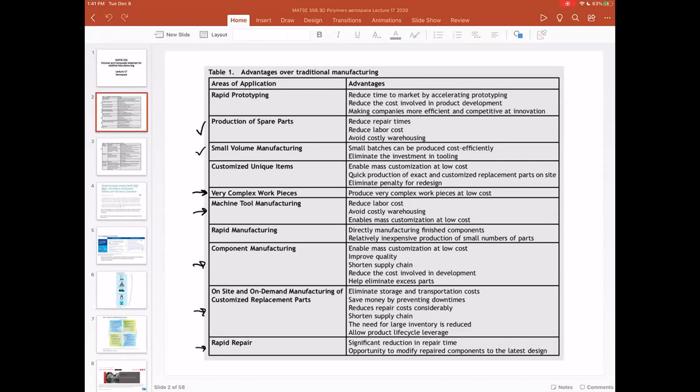So we refer back to this table and think about advantages over traditional manufacturing for additive manufacturing. And a lot of these things relate to the aerospace industry. So whether we're doing prototyping, whether we're doing component manufacturing, reducing aircraft weight. We'll talk a lot about that today because that is a major driver of additive manufacturing in aerospace, new engine components, flight certified hardware, and then satellite components where weight is a really big savings.

And often for satellite components, you're only making one of them or two of them. So additive is a real natural fit for space applications. And additive has gone a long way for industrialization in the general aerospace industry, including commercial and defense applications. And I think Kyle put up a link in the chat last time about aerospace certification for AM parts.

We won't talk too much about certification, but it's a very special part of the aerospace manufacturing industry. How do you certify the materials? How do you certify the component? You know, when you make a part for an airplane, you don't always get to test that part to failure because that part is going to go on an airplane, and you don't produce that many airplanes. And so how do you get certification, statistical reliability, reliability of the manufacturing process and the materials?

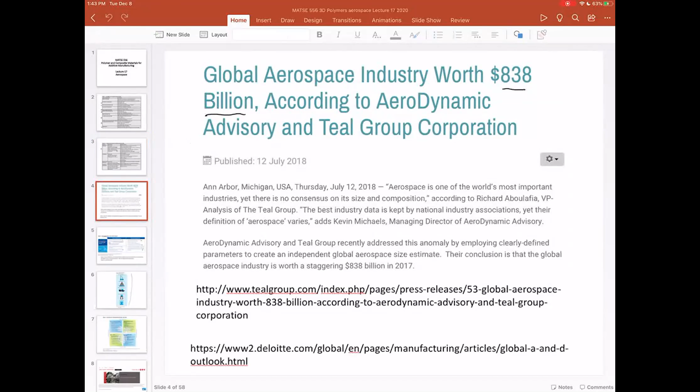So the global aerospace industry is relatively big, approaching $1 trillion. And so it's a market we're thinking about because if you can capture a certain percentage of $1 trillion, it's still a big number. And we talked about this table last time. And so A&D is aerospace and defense. And aerospace includes space and satellites.

And so there's lots of interesting current applications that people are looking at additive for, and lots of potential applications where people are developing new materials, new additive technologies, new approaches to producing these components. And so additive is a manufacturing technique that's really there to stay in aerospace. Just like biomedical, we've seen a conceptual change from how they made hearing aids or dentures in the past to how they're making them today with additive. And that same revolution is happening in aerospace.

Now, as consumers, we don't always get to see what those changes are. Of course, a lot of the special parts about airplanes and satellites are hidden from view. But when we go back to flying on airplanes here in the next year or 6 months, hopefully, most every airplane that you fly on commercially is going to have an additively manufactured part on it. So it's a big part of the industry, and there are lots of opportunities for additive in aerospace and defense, and lots of opportunities for polymers and composites in the aerospace industry.

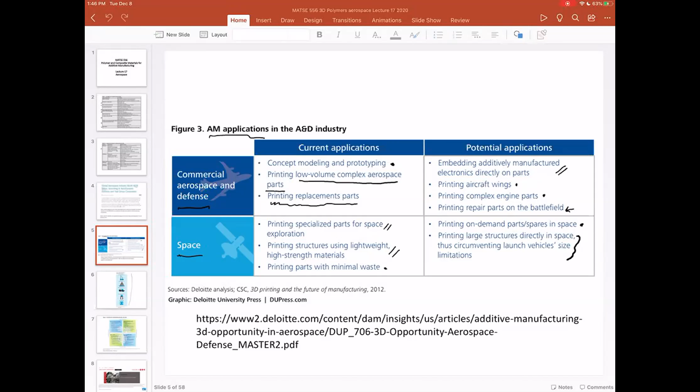So again, what we've learned in this class about high performance polymers, composites, and additive manufacturing will have a lot of importance in these fields going forward. And so there's important facets to the aerospace industry to remember when applying additive. And so this is from this Deloitte report, and we'll look at the link here in the next slide. But these are some of the key drivers in the aerospace industry for additive manufacturing.

So lower part cost, and decreasing part cost really comes from simplifying the tooling and simplifying the manufacturing of the part. So if you're only going to make 100 airplanes, you have to make the tooling for all those parts. And if you can do additive manufacturing, you don't have to make as many dies or as many casting facilities, etc., in order to manufacture those parts. And so part costs can come down drastically because you're only making so many parts for aerospace, even for commercial aviation.

Scrap is important. And so if you're using really expensive materials like carbon fiber and titanium, those are hard to recycle. If you recycle scrap, that has to be a certified process as well. So there's issues with recycling raw materials in the aerospace industry. And so if you can cut down on the scrap rate, that will also decrease costs because you're using premium materials in this sector.

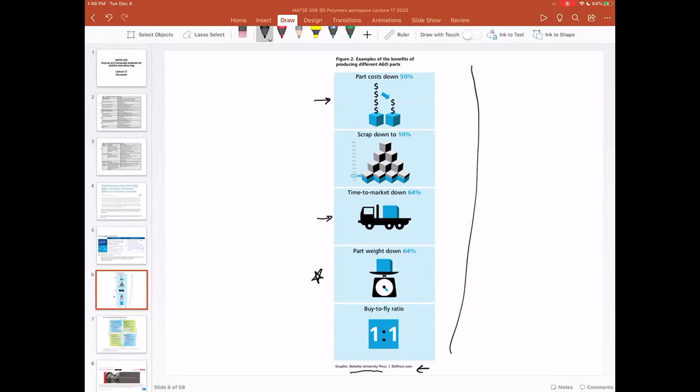So this is laid out in this Deloitte report right here. You can look up this report called 3D Opportunity, Additive Manufacturing Paths to Performance, Innovation, and Growth. That's fine. That's some buzzwords there. But thinking about how additive influences things like supply chain and product changes is interesting.

And Deloitte has sort of published this 4-quadrant diagram where if you don't have any supply chain change and no product change, you're sort of in stasis. And so you're just using AM to do the things that we know AM can do. You're doing rapid prototyping and design. You have low rate production. You're just doing routine stuff with additive manufacturing.

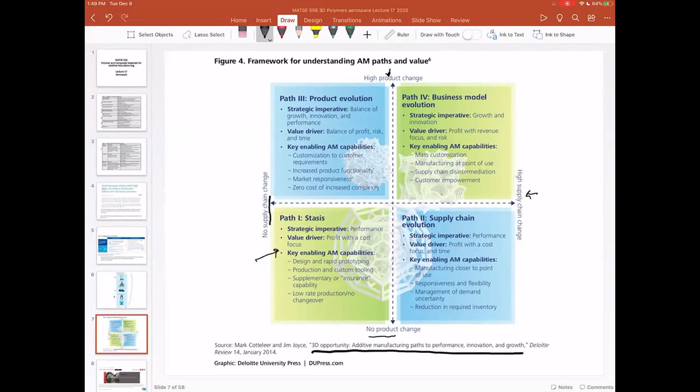However, as you get into high product changes, you can think about new products. And so how do you make new products with existing supply chains? So how do you do additive to do new things? Or if you're going to remake the entire industry, both changing the supply chain and changing your products, you have new business models. You can have growth and innovation. There's really interesting facets of AM with mass customization. Supply chain is disrupted, or there's new ways to do supply chain. You could do manufacturing at point of use.

And so thinking about the different aspects of what changes are occurring in the industry and what's happening with the products in that industry is a really interesting way to think about how additive manufacturing can contribute to aerospace, to automotive, to consumer goods, to medical and dental. And so this 4-quadrant diagram from Deloitte gives us a map for how we might think about placing additive in specific industries.

Are there any questions so far on aerospace or key drivers or unique facets to AM?

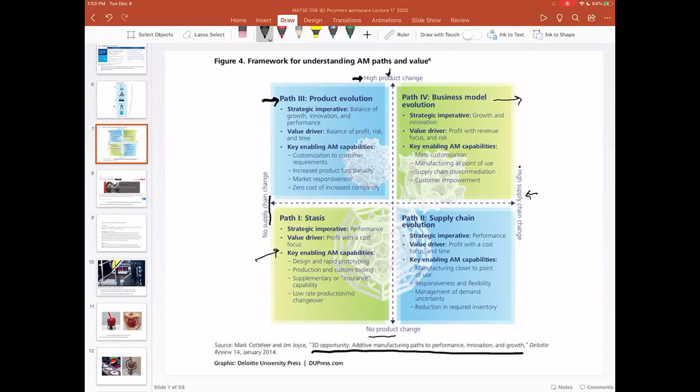Great. I'll put it up on Canvas for people to check out, because as we said when we started the lecture, qualification and certification is how things are done in aerospace. And so anyone who works in that business needs to be aware of it. Great. Thank you. Absolutely.

So there's a lot of cool case studies out there on aerospace, and this is from Prodways, that's an AM manufacturer. And so what they're doing is they're doing lost wax casting of turbine blades. So they're not AMing the turbine blades themselves because those are made out of metal.

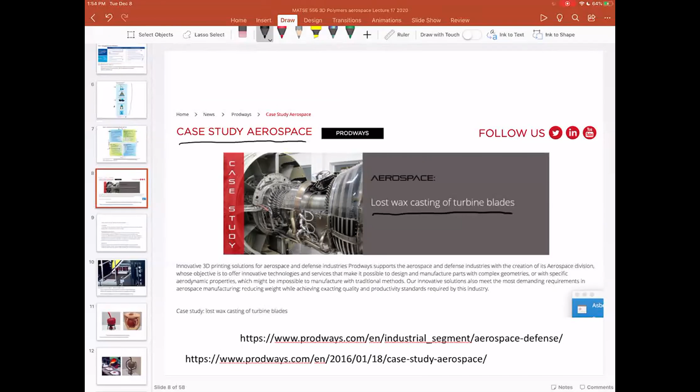So Prodways is not AMing the turbine blades themselves, but they're AMing the form or the wax model that's used to do this lost wax casting. And so you can check out this case study on their webpage, but we'll walk through it here. And so what they're doing in essence is using AM to make the tool. So they can do more complex shapes. And so reducing weight, increasing efficiency, that's very important.

They have two solutions that we'll look at here. So they call this DLP printer their moving light technology. So we'll talk about that in a second. But they use a specific resin for this lost wax method. And if you don't know what lost wax metal casting is, we'll talk about it in a second. But basically, this is a resin that's meant to disappear when they fire this mold in an oven. So they burn away all the resin to create a cavity, and then they pour molten metal in the cavity. So this is a resin specifically designed to go away.

We've talked a lot about mechanical properties of polymers. We've talked about composites and how strong they are or what they're used for. But this is a unique design of this DLP resin that's meant to burn out efficiently. And if you've ever taken a metal casting lab, people have used styrofoam. They use wax shapes to do this sort of thing. And so we'll walk through both the printing technology and this lost wax process. But this is, again, not AMing the product that's going out the door, but using AM as a way to develop a tool to do the manufacturing you want.

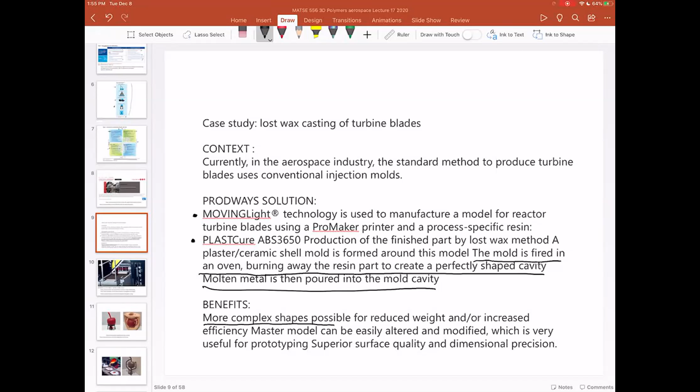So this slide here with this YouTube video talks about this unique DLP process. And what's important in this process is that they have high resolution that's tiled, or the DLP is done in very small sections in order to get the resolution needed. And we didn't talk too much about microstereolithography or different ways to do DLP stereolithography where you're moving the image around the bath, but this is sort of a general method in order to get high resolution and large area printing using SLA or DLP. And so let me see if YouTube is feeling good about this video here, and we'll take a look at it. All right, here we go.

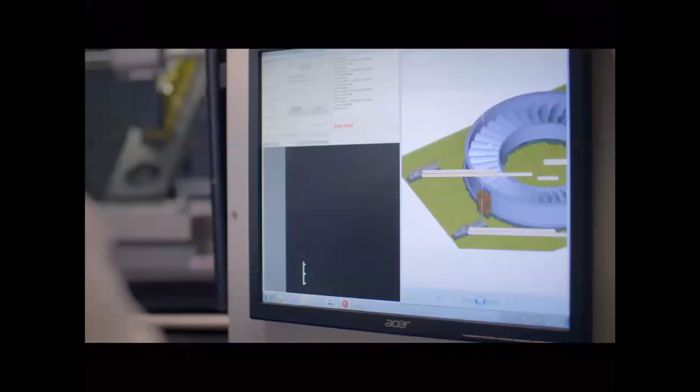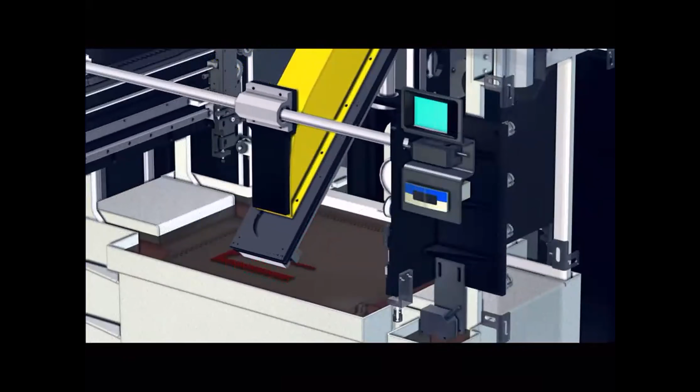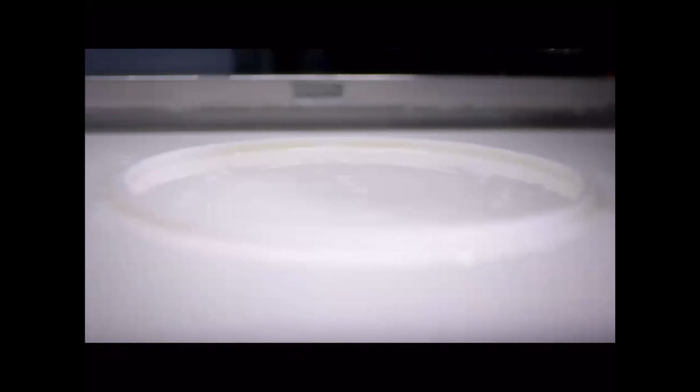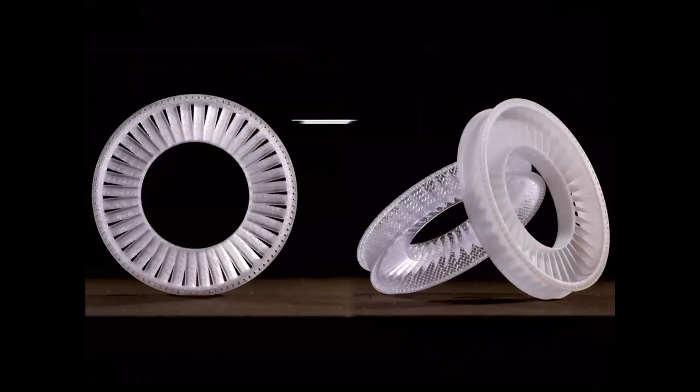Prodways aims to open up new opportunities for innovation and production by offering the most efficient additive manufacturing solutions and technologies on the market today. With our exclusive patented moving light technology, Prodways provides a unique solution, combining high precision and industrial production, enabling you to bring value to your market. Prodways moving light technology is an additive manufacturing technology using a vat of liquid resin polymerized by UV light to produce parts. At the heart of this technology is a moving DLP that projects an image made up of 2 million pixels, which sweeps across the platform to polymerize the resin in the areas required by the 3D CAD file of the part. After a single layer is polymerized, the build platform is lowered and a thin layer of new resin covers the surface, and the process is repeated layer upon layer until the part is complete. Prodways moving light technology stands out for its unequaled resolution at 40 microns per pixel for crisp details and superior surface finish on every part of the build platform, and high throughput, up to 10 times faster than market standards. Prodways provides a large range of innovative hybrid and ceramic materials for prototypes, functional parts, and for direct production. Our objective? Provide innovative solutions at every stage of your industrial process, whatever your field of application.

All right, so that's really interesting, and they started with an aerospace fan shroud, and then they transitioned to dental models and other things like that. But it's just showing the types of markets that these additive manufacturing companies are going after. And you saw a lot of familiar products in there and a lot of familiar examples that we've already talked about. So this idea of using custom resins...

Let me exit out of PowerPoint here and see if it comes back. There we go.

Well, it'll come up in a sec.

But now that we have different ways to AM parts, whether it's vat polymerization or fused deposition modeling or another AM process, now you can see how to integrate these different types of materials into whatever sort of process you're interested in. So resins that are designed for dentures, or resins that are designed for lost wax casting, or elastomers.

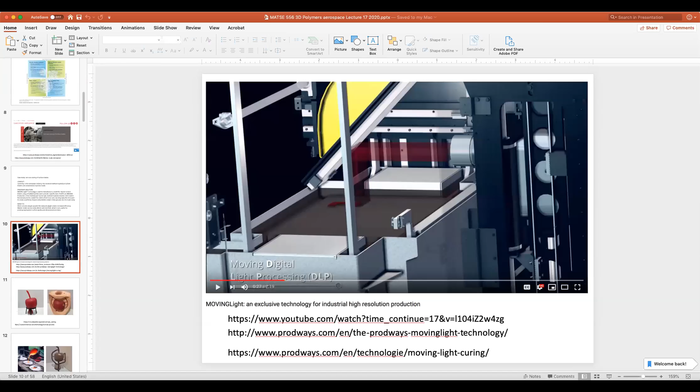Oh, what's going on here? All right, bear with me for a second. It's the end of the semester, and so the communication between Box and my PowerPoint is just not doing well. Okay, that might be the end of the videos that we can handle. All right, one more time. Bring up the lecture on my computer here, and I'll share it from my other screen. All right, let me stop sharing here. This might not ever work out. Let me share my screen from... Okay, can you all see that? Yes. Okay, apologies. It's just one of those days. So I can't write on this set of PowerPoint slides, unfortunately, because it's on my computer. But let me make my way through here, and we'll see if we can get the other PowerPoint sorted out.

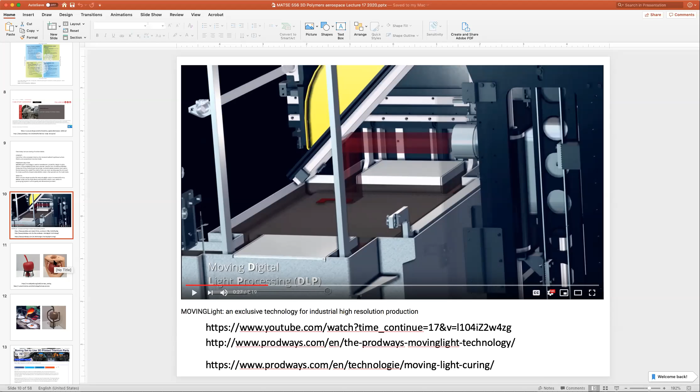All right, so we just saw this video. You can check out some others from Prodways, but this idea of making larger scale components with lost wax casting and designing both the printing process and the material to enable something like this. And so this now is a simple demonstration of lost wax casting, but if you've never seen it before, you can check out the Wikipedia if you want to, or Encyclopedia Britannica has a really interesting historical lost wax process. But this is an old way to make metal parts. So if you've ever seen a metal foundry where they do casting, this is one of the methods that they can use in order to get this done.

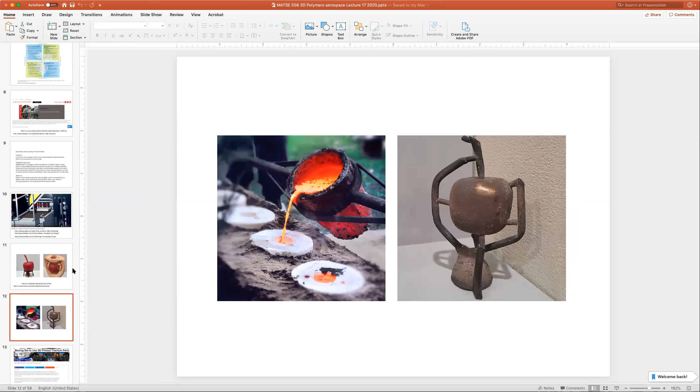But using additive technology, now you can have the additive manufacturing resolution and additive manufacturing complexity in the wax part that then you can translate to the cast metal part. So before these wax models were CNC machined, or they were done by hand, or you had to find a way to manufacture the starting model with the resolution, dimensions, complexity that you wanted in your final casting part. But with additive manufacturing, now you can just print these things.

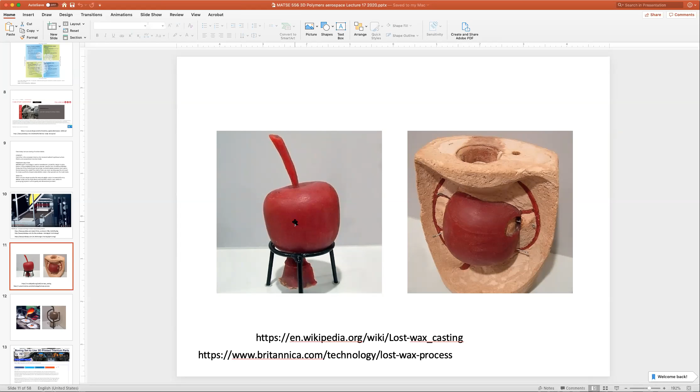And if you're an additive manufacturing hobbyist and have a printer at home, there's a lot of online guides for lost PLA casting. And so one of my former students had an aluminum forge in his backyard because his dad's a mechanical engineer. And so you can melt aluminum at relatively low temperature, and you can make a model out of PLA with your MakerBot or whatever printer you want, and do a very similar process where you embed the PLA in plaster of Paris, fire your mold, burn out all the PLA, and then do investment casting of aluminum using this process.

So this has been industrially deployed in addition to direct printing. And so whether you're casting large parts, as we saw in the Prodways example, or direct printing of titanium parts, the aerospace industry has employed both printing tooling and printing the part directly. So this is a news announcement from 2017 on AMing titanium parts to put on Boeing 787 aircraft. And so they talk about this is going to cut their cost down by $2 or $3 million per airplane. And so that's a big deal.

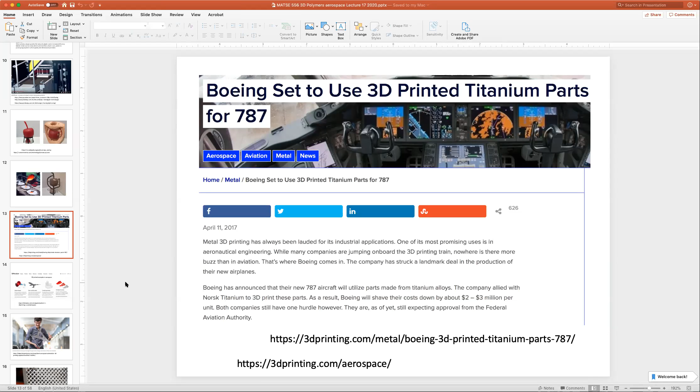And they're expecting approval from the FAA, which has already happened because this article was in 2017. But this is how the aerospace industry is doing business now. And this is starting to proliferate.

So if we look at the Ultimaker webpage, where 3D printing is used in aerospace, they have a lot of case studies and interesting ideas there. Whether it's validating designs and doing some fit testing, or printing in plastic before you try and make everything in titanium. Real life models. If you've ever been in an aerospace company, you know there's lots of models of airplanes and bench or desktop demonstrations and other things as a course of doing business in aerospace. And so they use AM to do a lot of those now.

Complex geometries, especially complex geometries of custom parts or of only a couple hundred parts. That's an important part of AM. There's only so many airplanes made, and there's only so many satellites made. And so being able to do complex parts in one piece is an important part of AM for aerospace. And again, lightness is also important. We saw an example of topology optimization, and the unique shapes that you can arrive at through topology optimization, additive manufacturing really enables making those shapes where they couldn't be made or machined in the past.

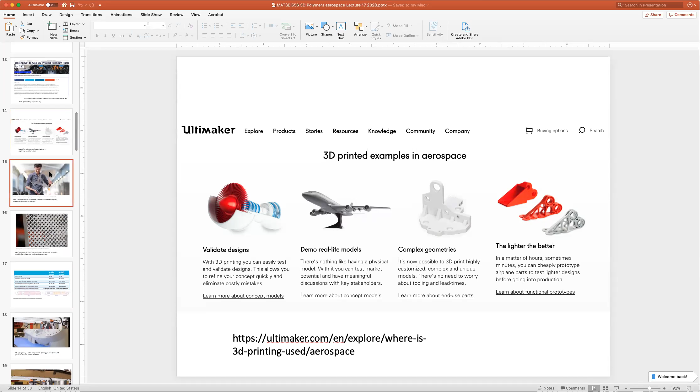So this is all the high level stuff of aerospace. And it turns out that there's a lot of pedestrian stuff in aerospace that we don't necessarily think about. But this is one demonstration here from this news article. And this component that Andreas here is holding is the leg of a seat. So when you go and sit down in your 737 or 787, whatever it is, this is right where you put your carry-on bag.

And so it turns out that a lot of the furniture in airplanes is expensive and it needs to be light. And so by using AM to redesign seat frames, you can see in the close-up of this unique gridded shape. That's interesting. And if you look closely, all of these grids are designed specifically for the stresses of this seat frame. So depending on the loading of the seat frame, thinking about the average size person on an airplane, how do you design a custom grid or a custom lattice to deal with those stresses, but make it as light as possible?

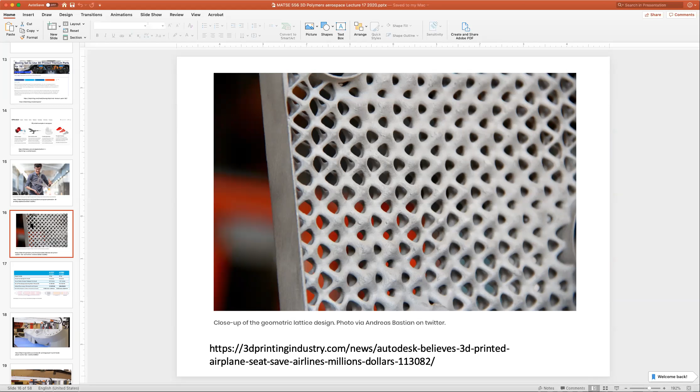And so this is possible in the aerospace industry, especially because lightness is so important over the lifetime of the airplane. So you can pay a little bit more for this custom solution, and that will pay off over the lifetime of the airplane. So this is really interesting, and this is using additive in a place where you're like, it's just a seat in an airplane. It's not that interesting, but it can be really important, especially when you start to look at the economics of what this weight savings does.

So this sort of payoff time or cost savings over the lifetime of the object pays for unique manufacturing processes, pays for custom parts, pays for some really interesting things that you can do in aerospace, because you say, well, saving 200 kilograms off an A321 is not really that interesting. That thing probably weighs 50,000 kilograms or 100,000 kilograms. I'm not sure how much an airplane weighs, but it's only a fraction of a percent, but it really pays off in terms of fuel savings because of the lightness factor of airplanes. So you can pay for new manufacturing, new materials, and new designs.

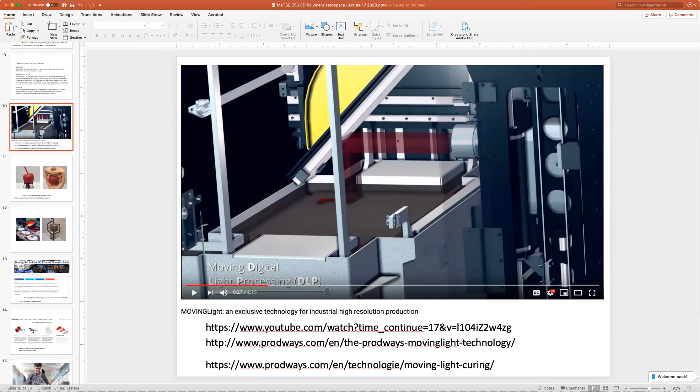But in order to make the larger parts for aerospace or turbine engines, or even in order to make this seat frame, this is made out of metal, but of course you could think about the corresponding polymer or composite seat frame, you need to have larger format additive manufacturing. And the only one that we've talked about significantly is big area additive manufacturing, where they were doing the Local Motors Strati and other larger demonstration articles.

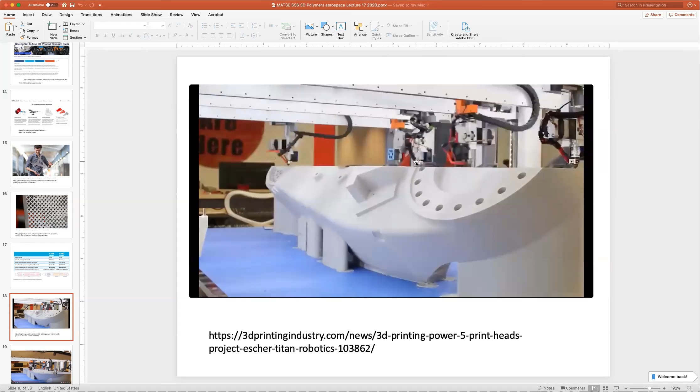But there's a lot of innovation now in using DLP or SLA, or using, in this case, material extrusion AM with fine resolution. So these are all small scale. Let me see if I have a better picture right here. Well, this is a material extrusion AM head that's integrated with now 5 of these multi-head 3D printing robots. So this is basically like a multi-head MakerBot where they can get large format prints at high resolution.

So when we looked at the big area additive manufacturing, they can make large format prints, but it's at relatively low resolution because of the large printing orifice that they're using. And we saw that in terms of the road size, in terms of the resolution of the object that they were making. And so finding a way to go to high resolution, in this case with material extrusion additive manufacturing, they can integrate all these different print heads together and now print larger parts at high resolution. And this is useful for aerospace because you need to make relatively large components for aerospace because airplanes in general are pretty big.

So we won't watch this video because of trying to get the PowerPoint and the video working together today, but I encourage you to check this out. And so people are constantly innovating in this idea of large format additive manufacturing using a lot of the principles that we've discussed throughout this class. So you can take a look at that.

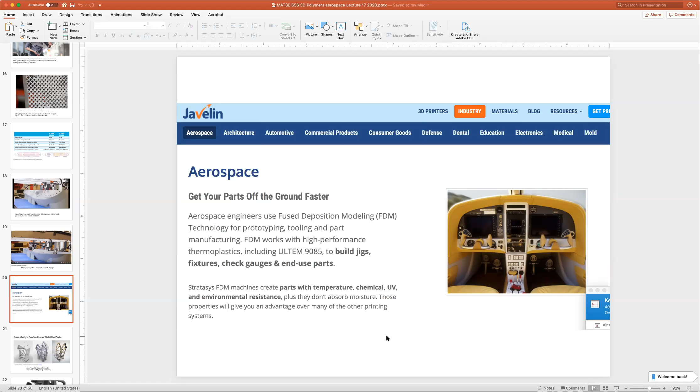So this is interesting. You don't have to have a custom process or a fancy printer. This is an area where even doing a high value material like Ultem, they can get demonstration parts quickly for aerospace interiors. And of course, if we're going to make satellites, and this is one interesting case study, and you can check this out on 3D Hubs. They have a section on aerospace.

You can see this case study for production of satellite parts where they go from this sort of garden variety titanium frame. They can do the finite element analysis for all the mechanics they need. They can do the topology optimization, and they come up with this lightweight titanium frame on the right-hand side, where now you can save weight, you can have the same strength. And again, this has that form of topology optimization where the reinforcement is just where it needs to be, rather than thinking about how do you fabricate this from titanium stock and machine it and everything else. So this can be printed in titanium.

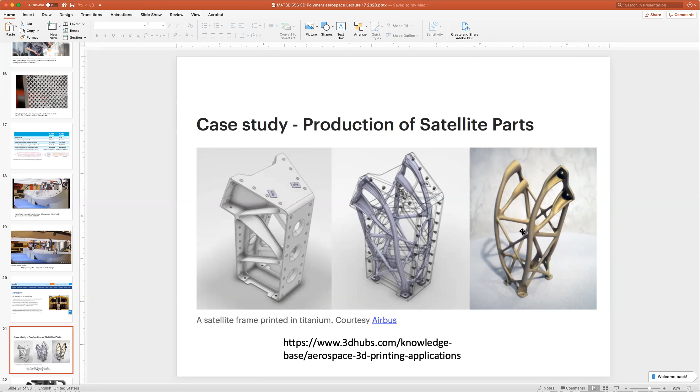And finally, all airplanes are really built like Ferraris. They're all hand assembled. So there's a lot of hand assembled work that needs to be done. And rather than robotic assembly that's all calibrated and ready, like we see a lot of robotic assembly of cars nowadays, you need a lot of jigs and fixtures to guide the hand assembly of airplanes. And so this is just one case study, again, from 3D Hubs of printing jigs and fixtures.

And this is not necessarily for aerospace, but this is placing badges on a vehicle. So when you buy a BMW, the model badge is in the exact same place on every single car. When you buy a Mazda or a Honda, the badge is on the same place of every car, and that's not put there by a robot. That's put there by a person. But aligning all those badges is really difficult without some sort of tooling to sit on the same place on all the different cars and allow you to place the badge in the exact same place.

And so this might be a pretty routine use of jigs and fixtures, but it's really important and it contributes to the look of the article. So next time you're in a parking lot, or next time you're on an airplane, look at how many labels there are. Look how many things are stuck somewhere. Look how many sort of badges there are for different sorts of things. They're all over the place.

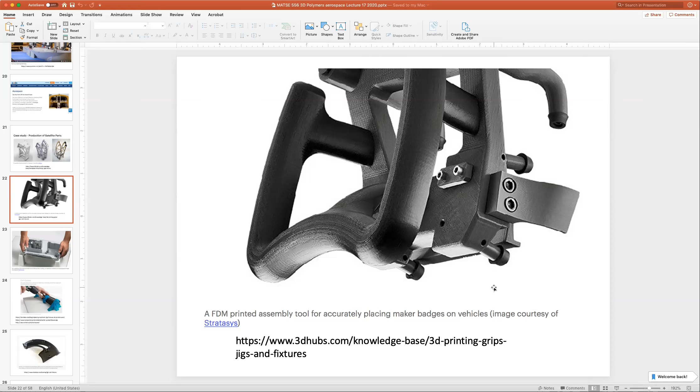And so you need a guide for how to put those on by hand, because someone just doesn't necessarily slap those things on wherever they feel like it. And so there's some really interesting technology for making jigs and fixtures and how to make these user-friendly and ergonomic, because it's someone's responsibility to put all the badges on the 318is. And so they're making hundreds of these things a day. And so you need a way to ergonomically place on all those badges.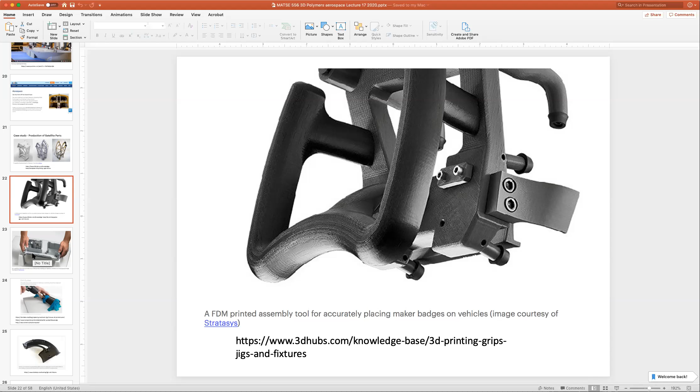And I have a nice video about this in the automotive section. And if we get to it, we'll check that out when we get there. I'll point it out. So same thing if you're going to assemble computer parts, or let's see. So this is some sort of injection molded component right here that this person's holding. And so this is going to be assembled, but in order to hold the part, well, you put the motors in, or put the electronics in, or put the other components in.

What they're pointing out here in this picture are the white jigs that are holding the part in a stationary position for assembly. So this component was injection molded, so it's complicated. It was injection molded. That's very interesting. But in order for this person to do the rest of the assembly of the component, whether this is a computer shell or a motor shell or something, I'm not sure, just having these white pillars in the right place is important in the assembly process.

And we see that for drilling components as well. So if you want to drill a hole in exactly the right spot in your component, just like you have a drill guide for surgery or dentistry, there are also drill guides for assembly of these jigs and fixtures or assembly of certain parts. And this is important again in aerospace because there's a lot of hand assembly done on an assembly line for an airplane.

They generally don't have the robotics manufacturing that the automotive industry is using, just because their number of units per time is a lot less. You make a lot less airplanes per time than you do cars. And so this hand assembly and ergonomic assembly and fail-safe assembly, trained assembly is really important because it's people involved in these processes. And so you want jigs and fixtures to make it ergonomic, easy, and to make the assembly fail-safe.

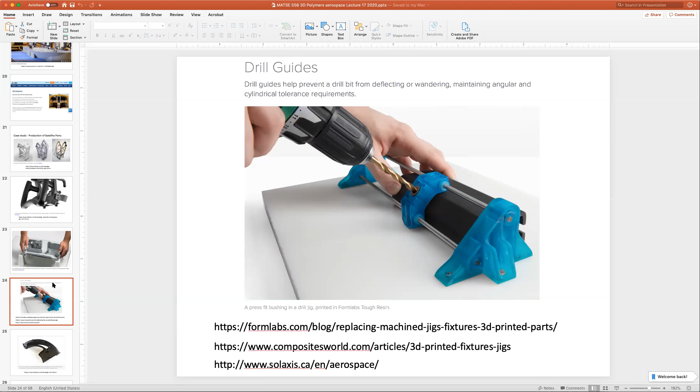This is just another example right here from Stratasys. And so they're using polymer as a drill guide for, it looks like, these braking components. So all of this goes to show that people are still putting together a lot of these industrial assemblies by hand, whether it's automotive or whether it's airplanes. And so this is using additive in the manufacture or the assembly of whatever components we're interested in, rather than having to additive all these different things.

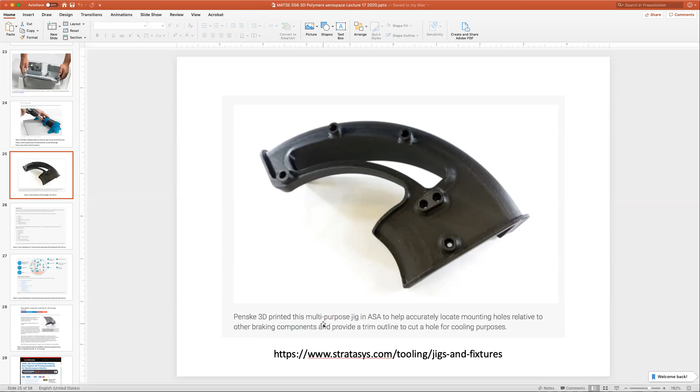I mean, even additiving something like this is possible, but if you're making enough of them and you can stand up an injection molding, you'll choose the most economical process for manufacturing this component, but it still needs to be integrated with whatever system it's going to be part of. And so there's a lot of things in airplanes, and there's a lot of components in the interior of airplanes.

And so we've talked about turbines, and we'll talk about aircraft wings in a second, but there's a lot of ducting, vents, there's a lot of baffles, there's cable management, there's electrical housing, there's light covers, there's trim, signs, door latches, seat armrests. I mean, all these components in airplanes need to be manufactured in some way. And so additive manufacturing is really a game changer in this industry where you're manufacturing just a few very unique components. And so aircraft manufacturers have taken real advantage of this.

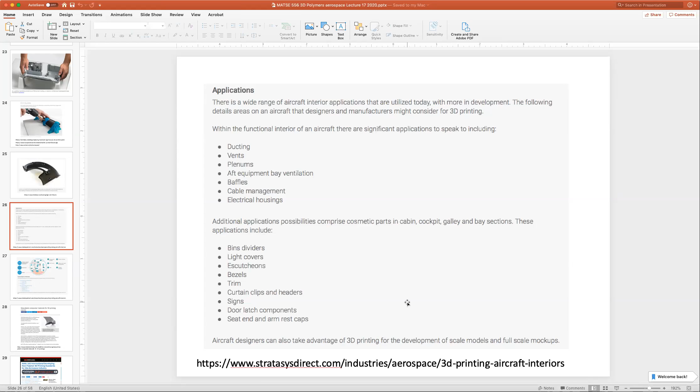And don't forget about the interior of airplanes as well as the functional parts that we point to. So this is just examples of all the different technologies. So whether you're doing fused deposition modeling or laser sintering or direct metal manufacturing, there's lots of different components that can be additive in the aerospace industry. Any questions or comments?

Okay, so I guess this is just a reminder to think about not only the high-end applications for additive manufacturing in aerospace. We always point to the titanium parts or the engine components, but the inside of the airplane is also a really important part, especially if you're in commercial aviation or you're doing custom aircraft interiors. And so there's a lot of cool manufacturing that can happen in that business as well.

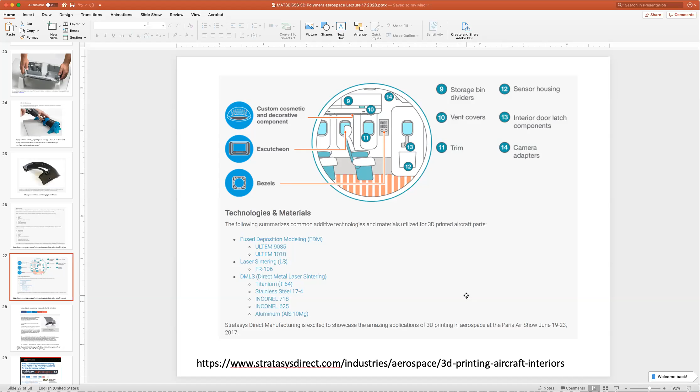So manufacturers have caught on to this. And so this is just a news item on new plastic composite materials for aerospace 3D printing. And so this is what EOS calls ALM HP 11-30. So you see all these crazy designations, but this is a carbon fiber reinforced polyamide 11. So this is PA 11, which is usually used in SLS additive manufacturing, and it's carbon fiber reinforced. And so this part here was produced using an EOS SLS machine.

Now this material, so this is talking about polyamide 11 in the first paragraph here, and then they talk about this polyamide 12 that's filled with lightweight glass microspheres, providing the same properties as a normal glass filled polyamide. So glass-filled polyamide is basically like glass reinforced nylon, but lower weight. And so this is really interesting because this is taking materials that have been used in aerospace and high-end polymer manufacturing for a long time, nylons and filled nylons, and really adapting that to additive manufacturing.

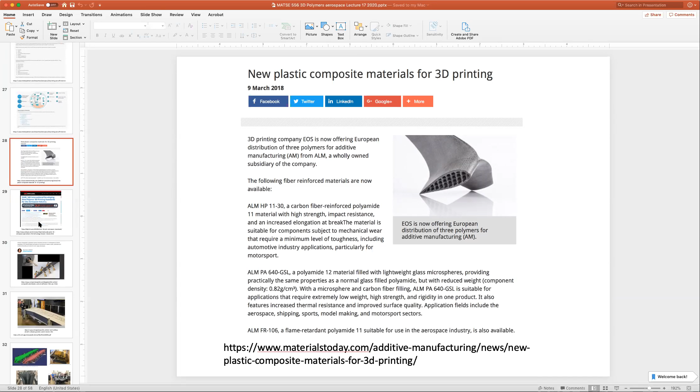So standards is also important, as Kyle indicated. Certification of components is important to the FAA in order to get your products in the marketplace. And there's a lot of certification bodies like the National Institute for Aviation Research and SAE, which are interested in 3D printing standards for the aerospace and other industries.

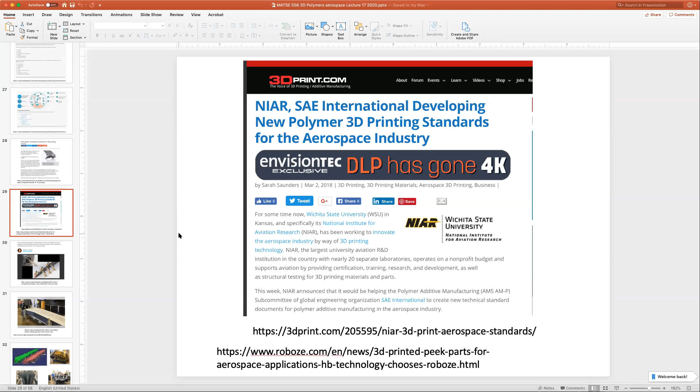And so this is just one place to look for standards, for quality assurance, for how you do manufacturing with additive manufacturing for these different industries. And these are constantly evolving as additive manufacturing evolves and as additive manufacturing becomes more and more a part of traditional manufacturing operations.

And so there's a lot of really interesting concepts out there in terms of additive manufacturing of larger scale components. So we just talked about some of the small scale stuff and about stuff that's possible today, but there's a lot of concepts out there that people are looking at for next generation aircraft wings, or in this case, composite wind blades. So if you've ever seen these huge composite wind blades driving down the road on the back of one of these oversized semi-trailers, they're humongous.

And so being able to additively manufacture those is an interesting value proposition where you don't need these huge jigs and fixtures in order to make these components. So you can check this out in terms of this opinion piece on manufacturing composite wind blades.

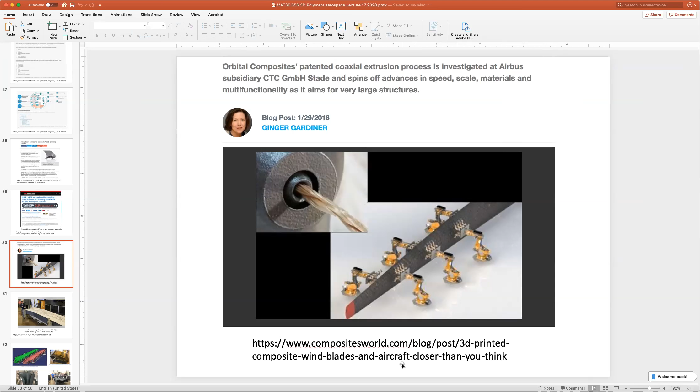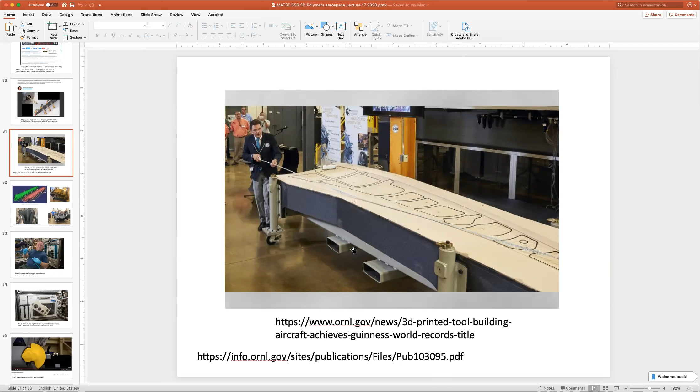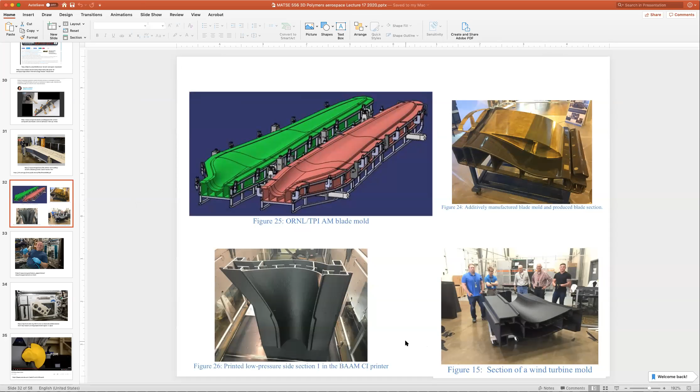And so now you can make tools, or you can additively manufacture tooling to facilitate the design and manufacture of these large scale blades. And so this is just a couple of photographs of what they're interested in for large scale additive. Again, not additiving the blade necessarily, but additiving the tools that are used to make the blade.

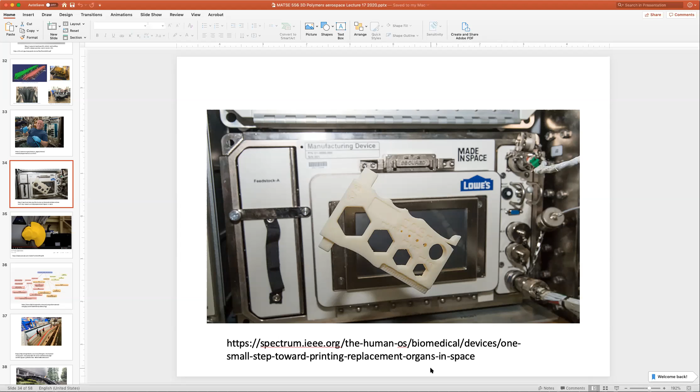All right, I'm going to try and play this next video because it's cool. Let me see if I can stop sharing. Let me go back to my iPad here because I had this video queued up. Oh, this PowerPoint's just never going to be healed. But anyway, there's the Cronus video if you want to see that.

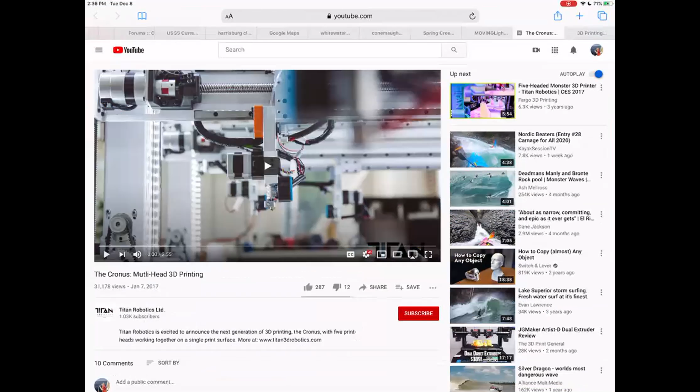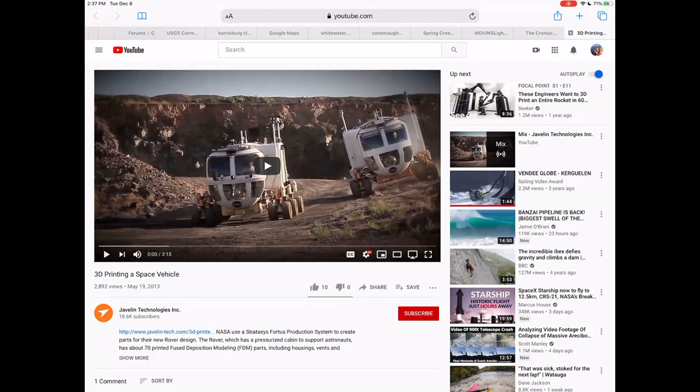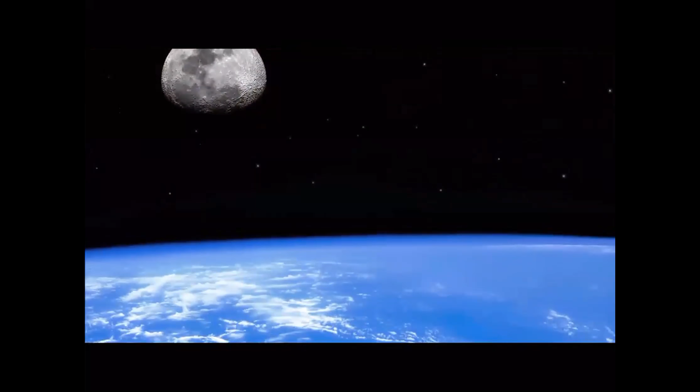We retired the space shuttle this past year after 30 years of excellent service to our nation, and its time had come. It had been a fantastic program. It had done amazing things, but now NASA is ready to really take the next step, which is a more continued presence in outer space beyond low Earth orbit. Our ultimate goal is to get humans to Mars.

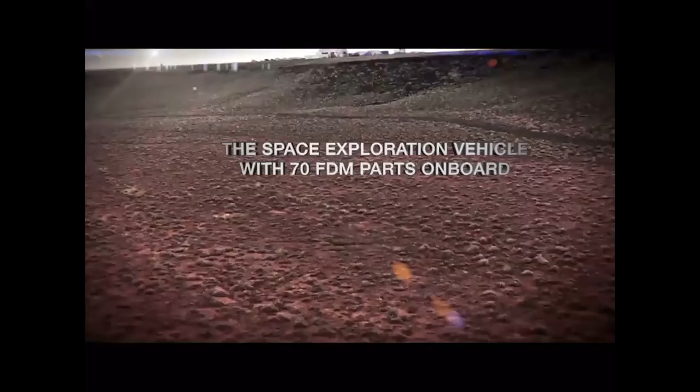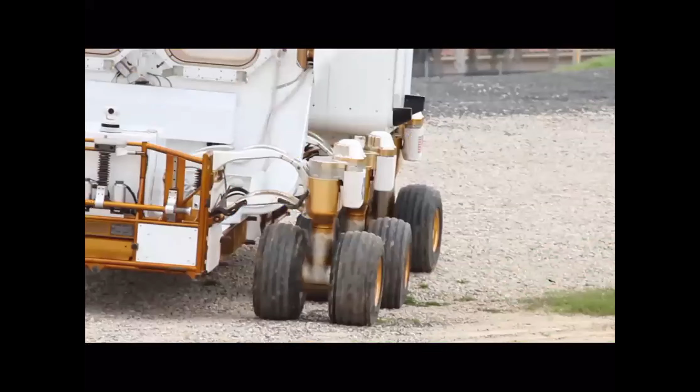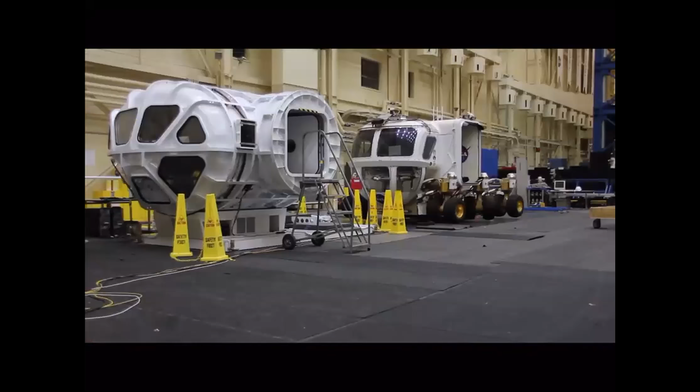When we started this project, we thought we were really clever thinkers. We had some technology we wanted to explore that involved multiple wheels and the ability to turn in any direction. They thought, well, what if we build a cabin and have the crew go out for multiple days? That's really where this small pressurized rover concept has evolved into the space exploration vehicle. So the SEV will hold 2 astronauts. They basically live in this module, in this rover. It's your own personal SUV in space.

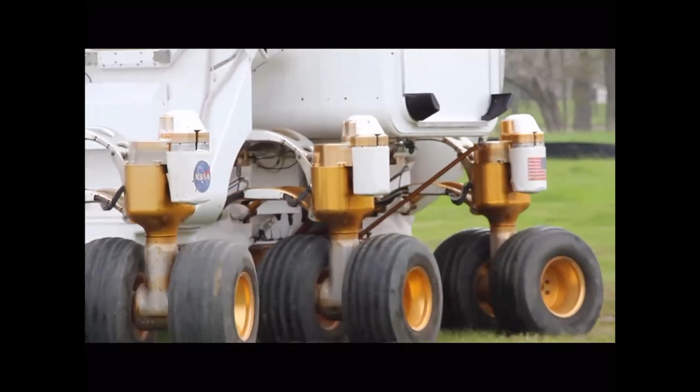You always want it to be as light as possible. You also want it to be strong enough that it's got your safety factors, that nobody's going to get hurt. You're going at several thousand miles per hour just to escape the Earth's atmosphere. So you've got to be able to handle all these vibrations and all these different things just to be able to get out into space. And the vehicle can't be damaged.

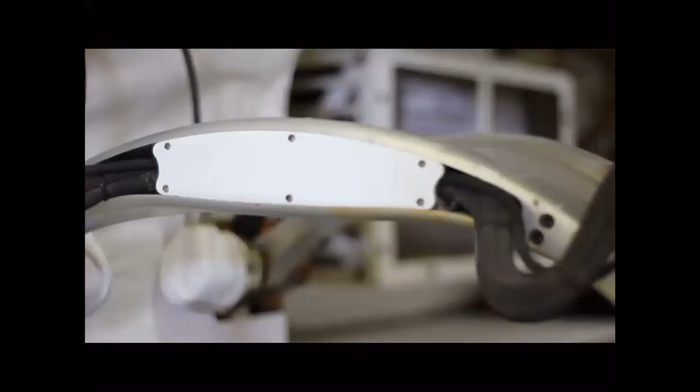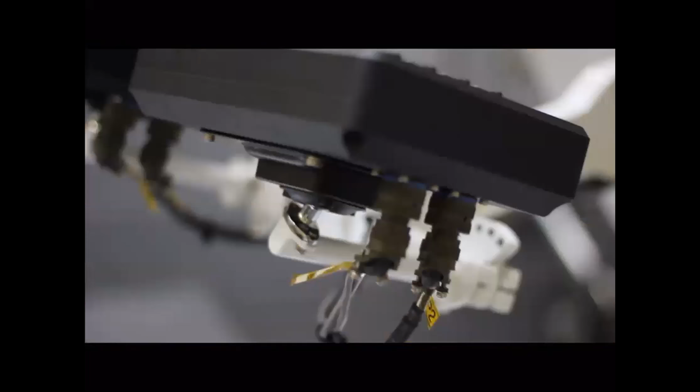There's probably around 60 to 80 parts on this particular rover. It's all done by additive manufacturing for a lot of different reasons. Sometimes traditional manufacturing methods don't really work for some parts that you want to build, where you can do it with additive manufacturing, and it's really simple. It really takes no effort for what would otherwise be a very complex process.

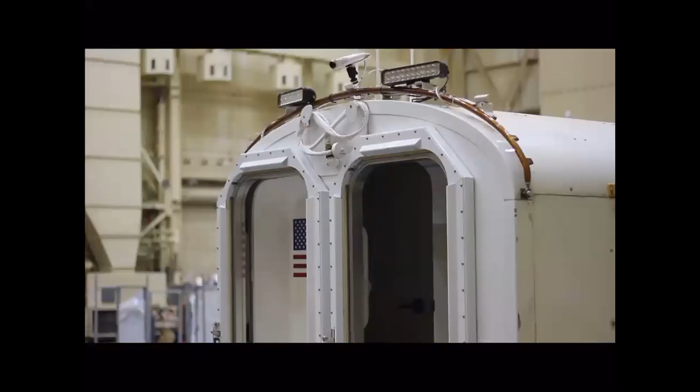Whether it be ducting that's got flame retardant characteristics and properties to it to help keep people safe, or different fixtures and different parts, there's absolutely a place for additive manufacturing. There's a lot of things that you don't see that really get to go on, like the design verification and the functionality checks of parts before we send them to be manufactured.

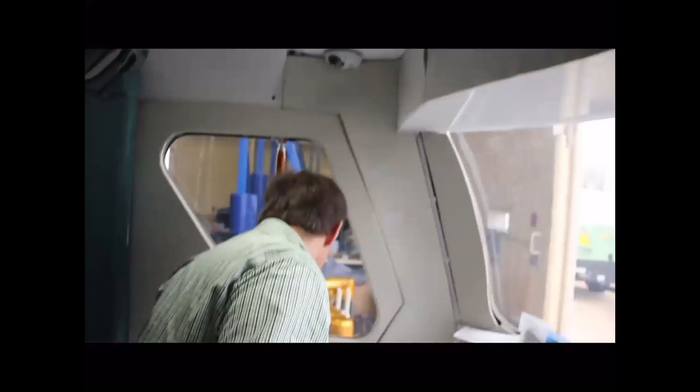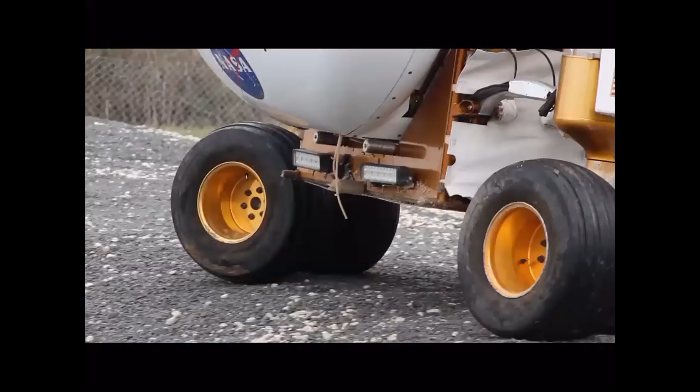If the final product is not going to be an additive manufacturing plastic part, we will do it in a rapid prototype fashion where you'll get it back in maybe an hour, a day. What that allows us to do is check our design and make sure that everything's going to work the way we think it is. Sometimes vendor components are a little bit different than what you anticipated, what the drawings say. So you're able to functionally build up this assembly and check it to say, hey, this is what we want, or hey, we need to make some tweaks. So by doing additive manufacturing, rapid prototyping, it allows you to keep your costs down. Everybody's got a budget to deal with, and we're no different.

Being able to make a difference and leave my mark is really what inspires me. You know, that's what gives me the drive to do what I do.

Okay, so that's really interesting. Let me share my screen again to get back to the PowerPoint slides.

And what's interesting that they talked about in aerospace development is actually using additive manufacturing, which we think about as expensive, as a cost savings for aerospace component development. And they're using just FDM. And of course, this is probably a coated part because it's nice and smooth. It's white in the video. They just highlighted it in yellow here.

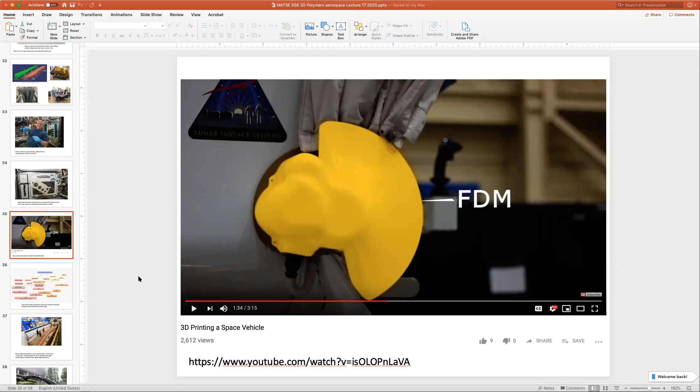But using FDM to produce these custom covers or custom electronics holders, that's a really interesting part of how to mock up unique vehicles or how to mock up interiors and make tweaks. So you don't need the highest tech additive to do stuff like this. They're using Stratasys FDM machines to mock up the next lunar rover. So that's pretty cool. All right. Any questions or comments on that?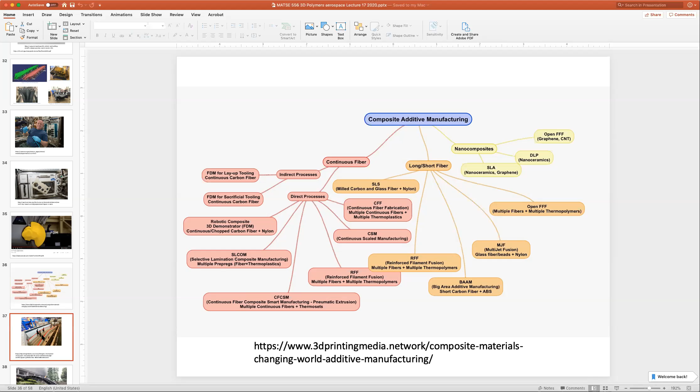One of the things that people are doing a lot with now is structural assemblies with composites. So we've talked about mobility or smaller components, but there's a lot of infrastructure development out there with additives. So people are interested in concrete 3D printing, but it turns out that making these composite bridges or these walkways or making structures out of polymers and composites is something that folks are interested in for urban renewal. Of course, polymer bridges don't rust, they don't have to be painted, they don't crumble like concrete. So there's some really cool articles out there in terms of using polymers and composites for infrastructure or architectural purposes.

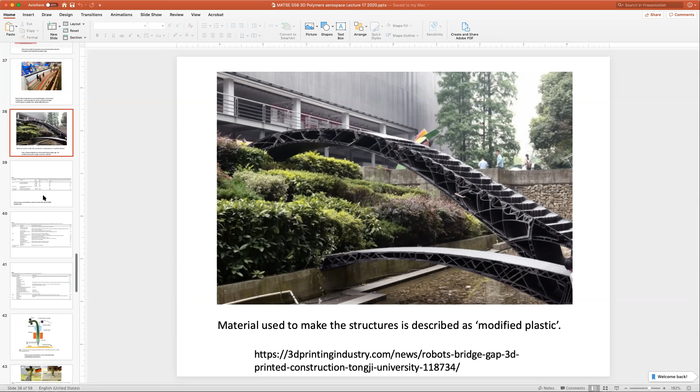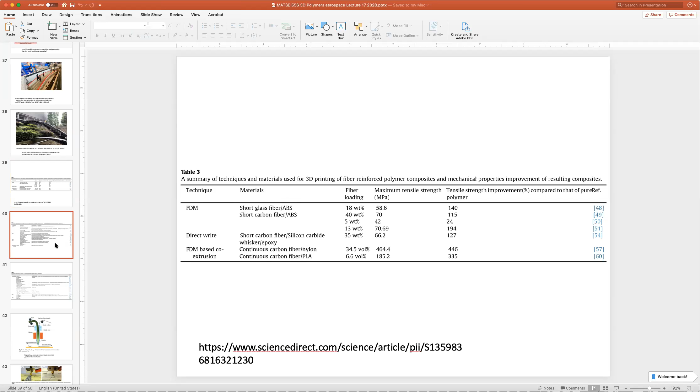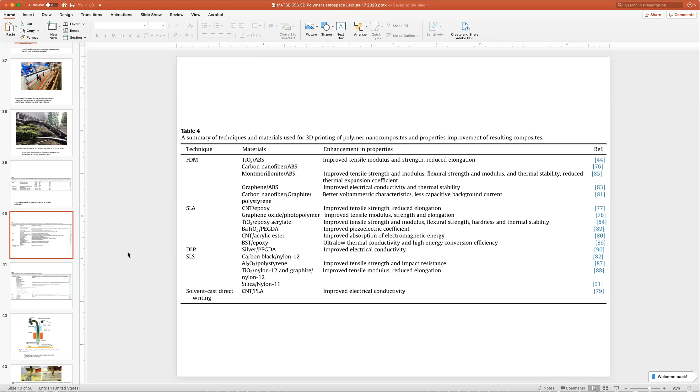So there's a lot of these out there, depending on, again, whether you're interested in solvent cast direct writing or DLP, etc. There's a lot of unique composite properties and unique composite materials out there in the literature. And so here's one for biomedical applications. You can take a look at that.

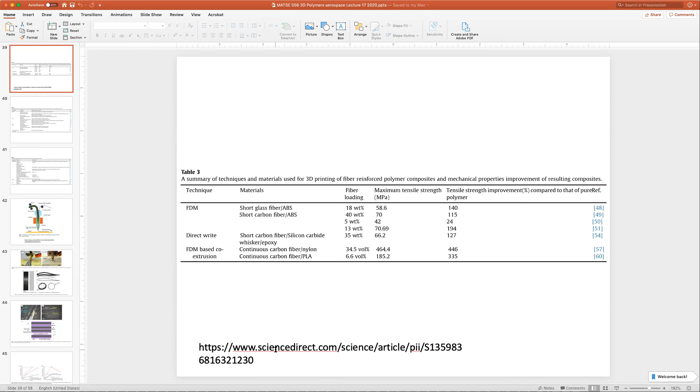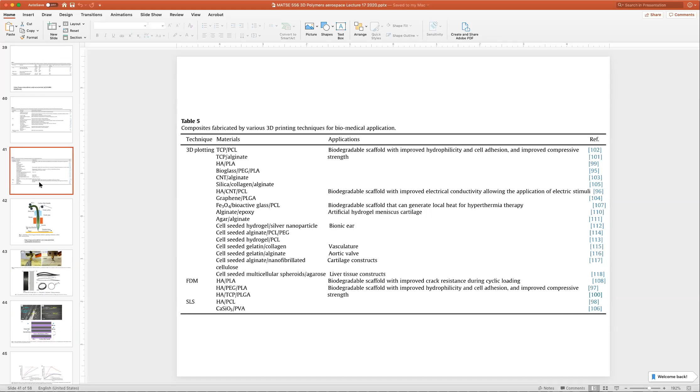And so the one area that people are doing a lot of innovation in, and that's why I pointed to this review article right here, is that some types of composites are still difficult to additively manufacture. So even though there's a lot of examples out there, you sort of see the same stuff whether it's material extrusion AM or FDM, or whether it's SLS or SLA. Those processes lend themselves to certain form factors, but people are innovating in terms of how do you integrate the types of composites that have the highest strength and highest performance into this idea of additive.

And this is a type of material extrusion AM that we haven't talked about in class: how do you get continuous carbon fiber? We've seen a couple little videos of this, but if you look at how sporting goods are manufactured, or how aircraft carbon fiber composites are manufactured right now, it's usually continuous fiber. And so continuous fibers are the strongest fibers out there. They yield the strongest components.

There's certain methodologies for when you make a continuous fiber composite versus when you might make a woven carbon fiber mat composite. But being able to use continuous fibers versus chopped carbon fiber or nanocomposites or something like that is important. And so now this article describes how you might integrate continuous fibers with material extrusion AM. And you really want to produce parts that now look like this.

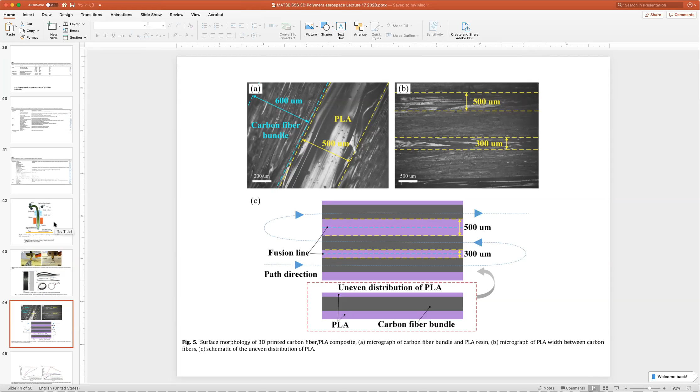So we'll pick this up next time, because this is now the intersection of all the stuff we've learned about composites, sizing agents, matrices, fillers, some new types of additive technology, and these high-end applications where you can't get the properties from chopped fiber composites that you can from these continuous fiber composites. And we'll talk a little bit about this because this has relevance for aerospace and automotive and high-strength applications of polymer and composite AM.